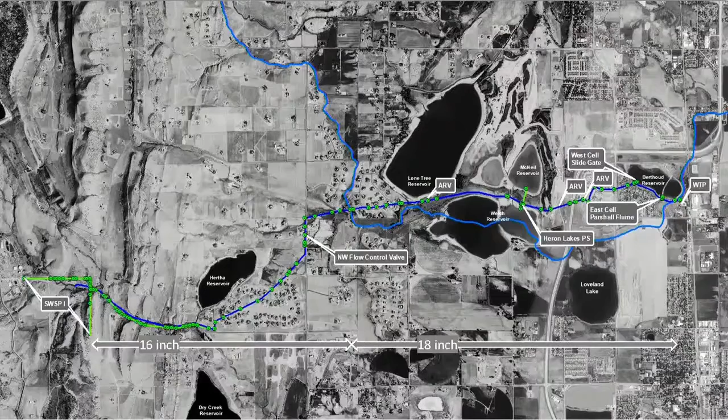Some of the things that we're dealing with are these appurtenances that are along the pipeline. If you look at the map, you see ARVs represented there; those are air relief valves, and this one is the furthest west air relief valve, and that basically is a pipe that's vented to the atmosphere. If we try to push too much water through the pipeline, it starts pouring out of that pipe.

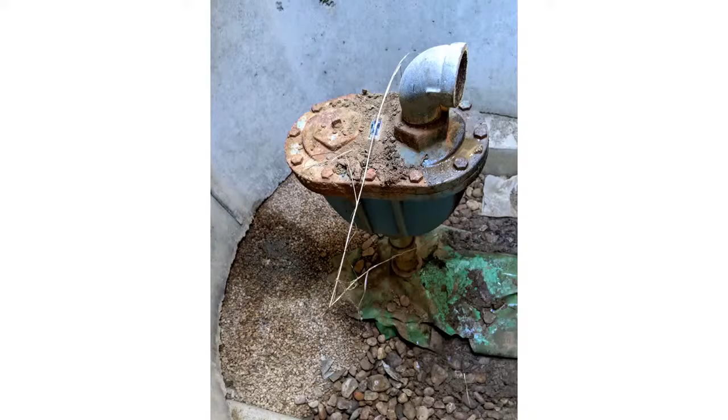The other type of ARV that we have looks like this. It's an old appurtenance, basically the same age as the pipeline itself. What we theorize is going on is these things aren't functioning the way they should. Air is trapped in the pipeline. I don't know if anybody remembers or used to drive a car with a carburetor. It'd get old, your fuel pump's getting tired, it's a hot day, and your car won't start and it vapor locks. Kind of what's happening here. We got air in the line and we can't move as much water as we should through it. So that's one of the problems.

Actually, we're out dealing with that now. Our contract operator is assessing these ARVs and has sent me a recommendation on repairing them. What we're going to do once we get those ARVs fixed or replaced is we're going to do a flow test and measure pressure and flow. We're going to cooperate with Northern Water and just get a good basis to correlate what's actually occurring in the field with what we're analyzing with our engineering tools. And then from that, we can look at modifications to that pipeline in order to try to get some more capacity out of that. So I'm very confident that that existing pipeline will be able to do what we need to do from the standpoint of these ARVs to get the additional capacity out of that.

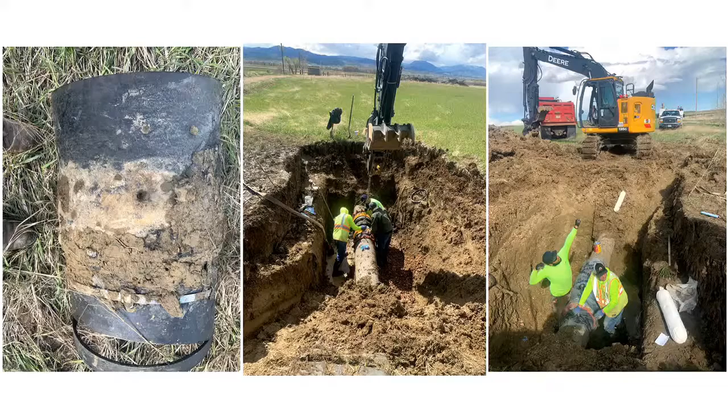The other thing that we need to keep in mind is the condition of the pipeline. In order to get more flow out of it, we're gonna have to boost the pressure up. Here is an example of what occurred earlier this year out on the pipeline. And that picture to the left is a corrosion problem. That's been kind of an annoyance for us over the last several years. Maybe once a year, twice every 3 years, we will have a kind of catastrophic failure.

This one right here was, as I understand, I didn't see it, kind of a colossal leak spurting up into the air and everything, and here it was quite lovely. Anyway, you can see how they repaired it. In the picture on the right, they're quite proud of the repair. So we'll assess the condition of the pipe. Possibly some rehabilitation of that pipe may be necessary in order to handle the additional flow and pressure. We'll know as we're moving forward.

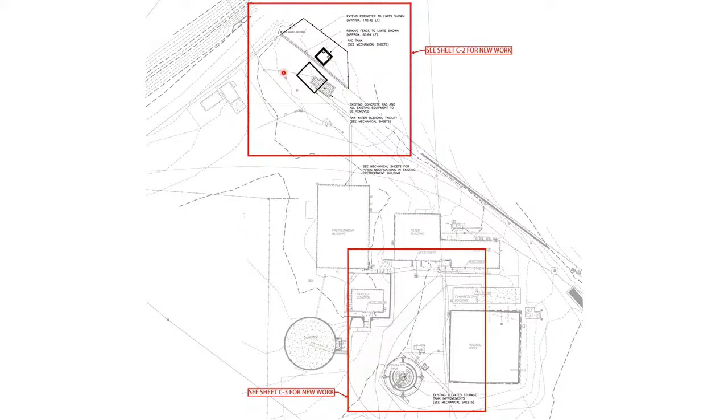So let's walk through those quickly. Here is the footprint. This is the actual site plan of the treatment plant site itself. Zeroing in on the blending facility, what we're looking at here is a building right here, and then this is a buried tank where we will be mixing up a PAC slurry, a powdered activated carbon slurry solution that then will be injected into these influent lines.

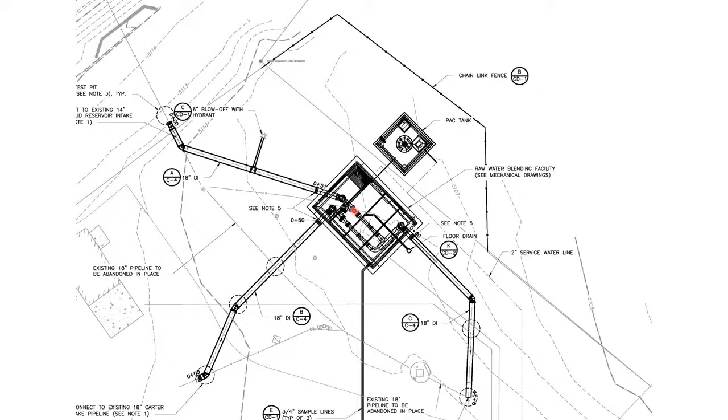So we got this line right here, that's coming in from Carter Lake with no stops. It's just straight from the Carter Lake pipeline. This right here is coming in from the reservoir. And that's what's key. We're not using this facility right now because of the water quality in the reservoir. And so even if we improve the water quality, what we can't do is adjust the flow rates of these two sources and mix them the way we need to in order to get the chemistry right. So that's a big part of this project here.

Let's zero in on those a little bit closer. This is the buried PAC feed system. Basically, it's a buried tank in the ground. It's kind of like a giant ninja mixer, but instead of 1,500 RPMs, this is like 2 rotations per minute. It moves very slow, and then the slurry feed comes out here. Then it goes into this.

So this is the meat of the project. This will be a pipe gallery below ground where the 2 pipe sources come in, and then these various meters and valves are all tied into our SCADA system, and then we have an opportunity to throttle this one down or speed this one up or vice versa. And then this is our final raw water line that then goes to the plant. Right here is our chemical feed equipment. This is pretty high precision equipment that allows us to give the exact right amount of PAC.

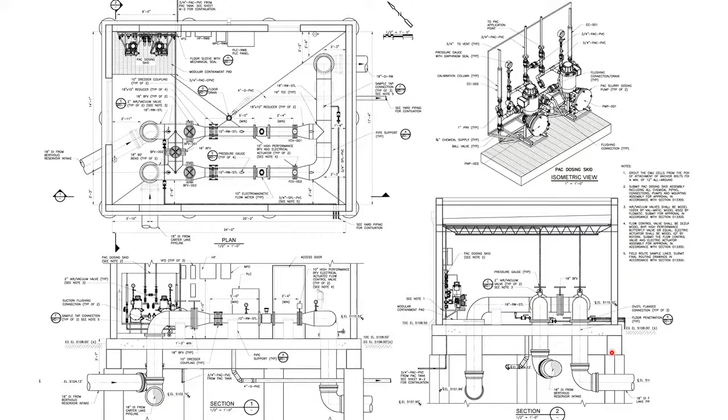And here's the blow up version of that. Here's a section version of the building with the roof and the bar joists and stuff such as that. So that's essentially what that side of the project is. It's nothing flashy. It's just getting some chemical into it and then getting it injected into the line.

The other side of this project is filtration. We're having a terrible time with our gravity filters. The problem is with these conventional water plants, as you can imagine, you clean the water up as best you can, you run it into a filter, eventually several times a week the filters clog and you got to run the water back through the opposite direction.

The problem that we have is that rate that we have to push that water back is almost as much as the capacity of the plant. The final pump stations that pump the water from the plant into the system are 2 million gallon per day pumps. The backwash flow rate is over 4 MGD. So we basically take all the water that we would need to pump into the system and we do nothing but run water back through our filter for not quite an hour.

And so it sets us back on our heels as we're trying to manage our system. We got to make sure our tanks are full because we can't rely on the plant and all that. So it's a big inconvenience, and it definitely impacts the water quality and the capacity of the plant. So what we're going to do to fix that, you recall seeing the old elevated water tank. Well, that tank has been out of service for a while. And what's being proposed is we're going to rehabilitate that tank.

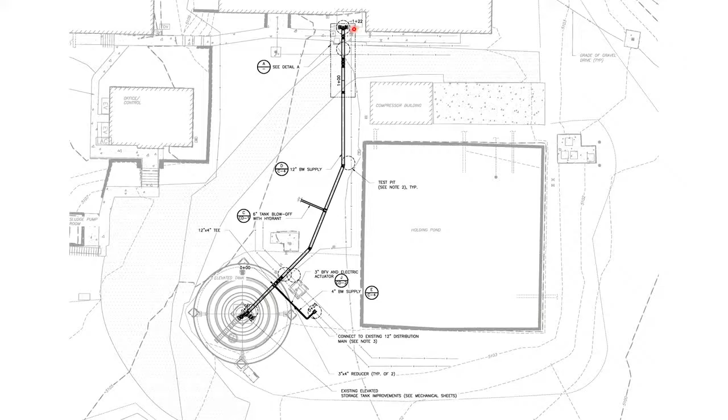Let's see, I think that's pretty much it there. I think I mentioned to you that we're looking to advertise the project right after the first of the year. The proposed bidding schedule that I'd like to propose to you guys tonight is to advertise on the 3rd of January. Publicly advertise that. We'd have a pre-bid conference on the 18th of January and a public bid opening on the 3rd of February. We would analyze the bids, and then facilitate an award to the Board of Trustees on your February 22nd meeting. So that's the proposed schedule.

The construction schedule of these, as you can see, is not huge. All of that work that I showed you there was about 4 months. The tank is a separate contract. That's a pretty straightforward process and a very specialized contractor, so we decided not to try to package that up with all that reinforced concrete. And we also have flexibility as to when to do that. We want that tank painted by the time all this work is done, but we don't want to be out there too early to where the general contractor is bunging up all the paint. We want him finished with that work and out of the way, and then we'll come in and clean up and paint that tank.

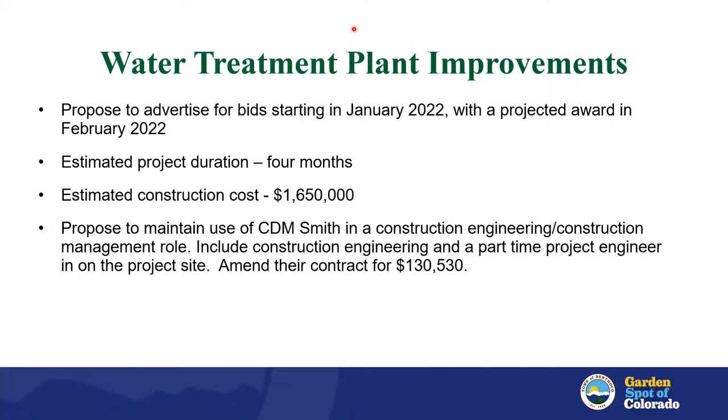Thank you, Mr. Matthews. Any questions? I didn't know if you had an order. Okay, well, there we go.

About how much capacity is this going to increase the water treatment facility by, percentage-wise? This work right now is not an increase in firm capacity of the treatment plant. That said, another out-of-the-box capital improvement we have planned for this year, similar to the tank, that doesn't require a lot of engineering, is a third high-service pump. That'll be another 2 MGD, which is a 50% increase in capacity. And so with that pump and these improvements, we shouldn't have any trouble at all reaching that.

Okay. In terms of future proofing, we're getting ahead of anticipated maintenance and things like that. This is bringing it up to speed and maybe even a couple steps ahead, so we don't have to have this conversation 10 years from now about expanding even more? No, this is not an expansion. This is a catch-up project. This will not serve the 2,600 SFEs that Pete was talking about. We're staring down the barrel at doubling that plant size. The next thing I'm going to come talk to you about is master planning for the wastewater, and in that project we will be dealing with an imminent water treatment plant expansion. Okay, I'm excited to see that.

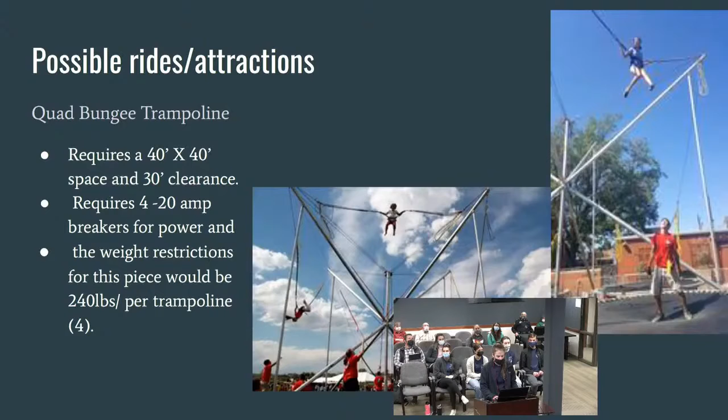So, just looking at the vendor that we specifically researched, here are some of the ideas of things that would be at this carnival. I'm just gonna zip through these, but if you want me to stop and explain more, I can. Hamster balls, a mobile ropes course, a mobile zip line, carnival swing, rock wall, bungee trampoline, and pedal cars. These were just the main ones that they housed, and obviously we're not saying this is the definite list of things we need, but it's just some brainstorming.

Some other ideas we had were having a dunk tank with teachers from the school in it or something fun like that. So we're still playing with it, but this is just an idea. And so that's what we have right now. Thank you guys for listening to us. Do you guys have any questions?

Thank you, Maggie. Questions from the trustees? I have one. All right, Tim? Trustee Hardy? Since they brought up Snowfest, I've always been trying to find more things to do for Snowfest. One is to get you guys to come build a sculpture. But I like the skating rink idea.

But some of the things that we have to take into consideration on that, and I could probably get Christian to find out from our insurance company, but the insurance for an activity like that, you start getting ice and sharp blades and teenagers. You gotta find out how those mix together, so no one gets hurt and liability's covered. The insurance would be my main thing on that, but I'd love to try and get something

like that going. Sometimes these companies cover their own insurance, I believe, for those situations as well, so maybe if I could find someone that would do something like that, then the liability would fall more on them, I guess. But yeah, I'm definitely looking for more things to bring to Snowfest. I've got a couple more weeks to think about it.

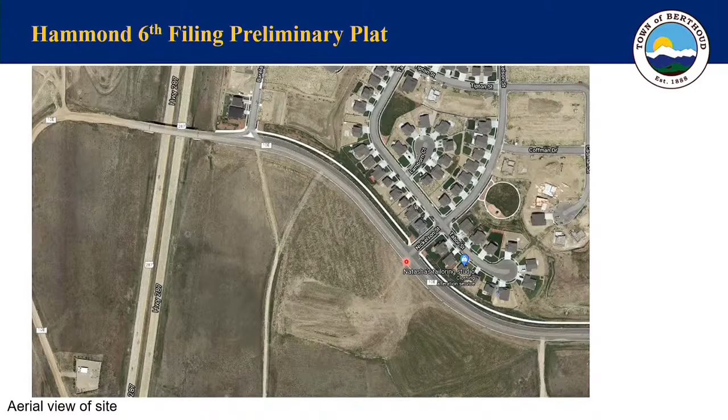So the current zoning on this property is R4, which is mixed use. This property was rezoned along with the rest of the Hammond subdivision in various different stages between 2016 and 2020. R4 allows for a maximum of 24 units per acre with a minimum lot size of 1,200 square feet. It allows the property owners to get a little bit denser than the traditional single family development pattern.

On the future land use map, this property is identified as orange, which is our urban residential zone, and a little bit of the reddish pink color, which is our suburban commercial zone.

So to give you a little background on this whole site: Hammond as a whole, all the way up to the bend in 287 down to the southern extent of this property, was all approved as an ODP and PUD back in 2008 with an overall density of 758 residential dwelling units and about 750,000 square feet of commercial space with a minimum of 5 acres devoted to it. It also allowed for high-density residential uses throughout the entire project. The original developer sold it to the current applicant, who, as he developed the land, has been rezoning it out of the PUD.

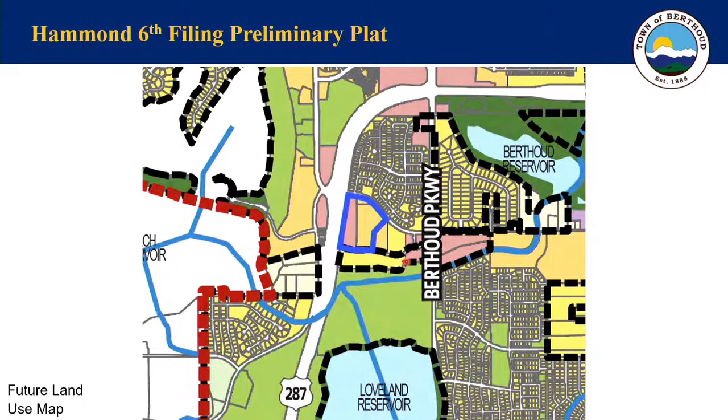I want to note that the entire southern half, south of 10E, of the Hammond property was rezoned to R4, so it's the entire area, as you can see here. The east side of this property south of 10E was a part of the Hammond 5th filing, which came before you all in 2020. Originally, the Hammond 6th filing and the Hammond 5th filing were combined as one. However, staff asked the applicant to pull the 6th filing portion just so we can make sure that there was enough space for potential off-ramps coming off of 287, as well as maintain the 5 acres of commercial that are supposed to be there.

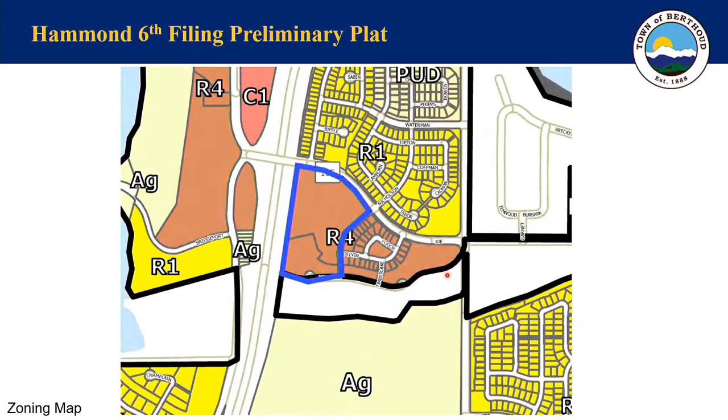And so with that, the Hammond 5th filing was approved by you all, which was the single-family detached homes on Nicholson and Delvin and the other street south of 10E. Because staff asked the applicant to break this up, to allow them to move forward and not hold their project up, we made an agreement with them that the open space, the parks, the subdivision identity, all the amenities that needed to be provided could count for both of them. So, for example, the park in the center of the Hammond 5th filing subdivision also counts towards the Hammond 6th filing subdivision. All the open space on the southern end of this project was also part of open space for the Hammond 5th filing project. They're allowed to count double because we were the reason that they weren't included together.

To expand on the off-ramps, staff met with CDOT throughout 2020 a couple times and were able to gauge where the off-ramps would potentially go whenever they were needed and built. While those specific locations aren't 100% locked in yet, we were able to determine based off engineers and CDOT that any off-ramps would not impact this subdivision if you were to approve it tonight with its current layout. It would also not impact the amount of commercial space required. They would still be able to have their minimum 5 acres of commercial space and not be inhibited by the off-ramps.

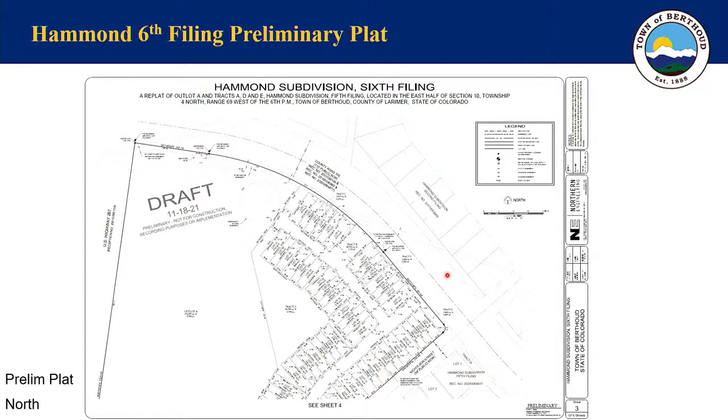This is a 0.65 acre park. And if you combine it with the 0.79 acre park in Hammond fifth filing, that gives you a total of 1.44 acres of parkland, which is more than the 0.95 that we would require between the two proposals. And then the applicant also has provided 0.4 extra acres of open space within this Hammond 6 proposal. Those are mostly found within slivers in between the lots to give them more space and some more elbow room, as well as on the end caps near the edge of the house.

If you combine that with the 12.74 acres of open space along that southern end of the property that Hammond fifth filing dedicated, that almost triples the 4.7 required acres between the two projects. As for the open space elements, the applicant provided a community lawn within the Hammond 6 project, which is that park, which counts for 2 elements, and that'll be enough to satisfy both the Hammond 5th and the Hammond 6 open space requirements.

As for subdivision identity, based off the amount of residential units proposed between the Hammond 5th and 6th filing projects, the applicant needed 7 different subdivision identity elements. They're using a pollinator planting palette, a soft surface trail, a pocket park, a playground, and wood fencing within the Hammond 5th filing project, which were each worth 1 element. As well, the applicant is also proposing alley-loaded streets in the Hammond 6th filing, which counts for 2 elements, bringing their total to 7.

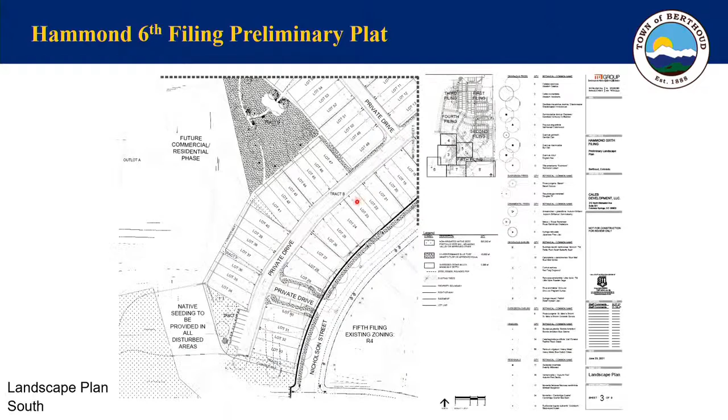Real quick before I turn it back to you, Mayor Pro Tem, I do want to point out that when the staff report was written, we hadn't received an updated submittal from the applicant. However, between then and today, we received an updated submittal that satisfactorily mitigates recommendations number 2 and 3. It's kind of tough to see because it's so far zoomed in, but this is on that corner. This is 10E and this is Nicholson. The issue staff had was that this alley, from southwest to northeast, kind of dead ends into County Road 10E.

We were concerned with the headlights of vehicles and overall noise coming from 10E that could potentially have negative impacts. And so we worked with the applicant to install more trees and taller bushes to mitigate this and make sure that the headlight glare doesn't reach the streets and the noise from the street does not impact the neighborhood. There are only, I think, 4 or 5 lots that would be driving down to this dead end, but we still felt it was necessary and that it would enhance the quality of the community. But the applicant's already mitigated that.

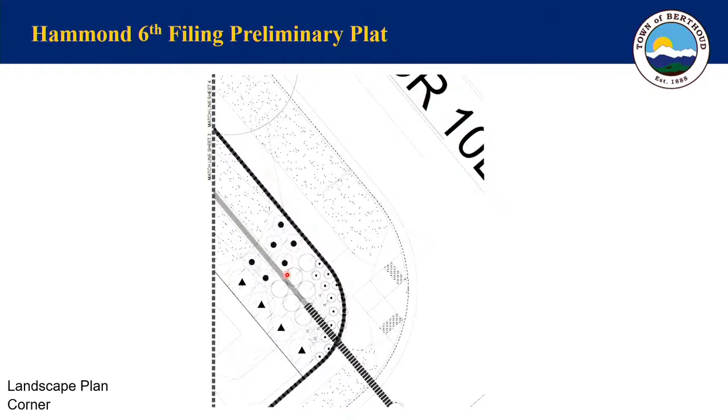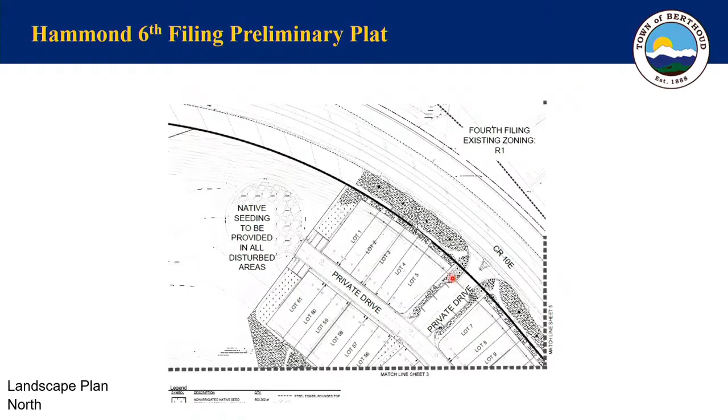And the other one regards the sidewalks. Initially, the sidewalks here accessing off of County Road 10E were attached. And they've since detached them to create the lawn that we all like to see. So with that, I turn it back to Mayor Pro Tem, and I will be here to answer any questions from you or the public, if you have any. Thank you.

All right. Is the applicant here this evening? All right, can you guys hear me? Is the volume okay? Just barely. Okay, I'll be sure to speak up. Is that a little better? Okay, great. I'm going to share my screen so I can show you the presentation. Give me just a moment. All right, are you able to see the screen?

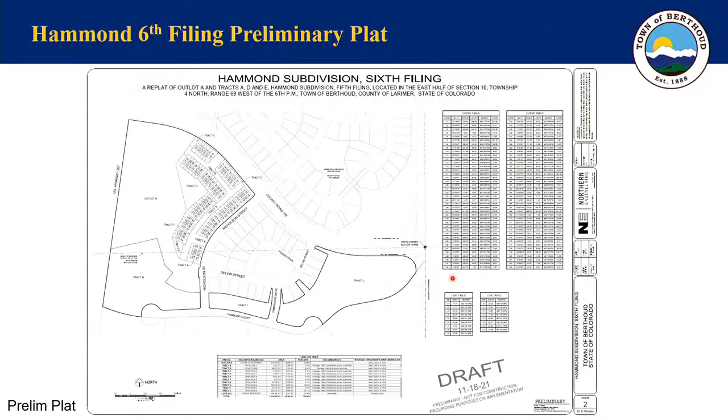Of course. My name is Kristin Turner. I'm with TB Group, and we've done the planning for this project. Our address is 444 Mountain Avenue in Berthoud. So let me know when you're able to see the plan, and then I'll get it. Okay, perfect. Always takes a minute to get set up, so I'm glad it's all working.

Well, thank you for being here tonight to hear about this project. We were really happy to be able to bring this back. As Adam mentioned, this portion of Hammond had originally been envisioned as part of the 5th filing, so this entire area was planned cohesively. And we totally understand the request to remove it from the 5th filing so that everybody had the time to evaluate the possibility for ramps, where those might land, and how that might impact the commercial area as well.

So we held off on the townhomes, and now progress has been made on those ramps, and we understand that there's plenty of room within the right of way, and it won't be impactful to the site. We are just glad to be able to bring these townhomes back and present them to you. So can you guys see the mouse when I move it, or the hand, I guess?

Okay, great. It will just help me to be able to point things out to you. So we have 61 single family attached units here. These are fee simple for sale lots. And as Adam mentioned, these are all located in the R4 portion of the Hammond property. And so I'm just going to give you a quick tour of the site, and then we'll take it from there with any questions that you might have.

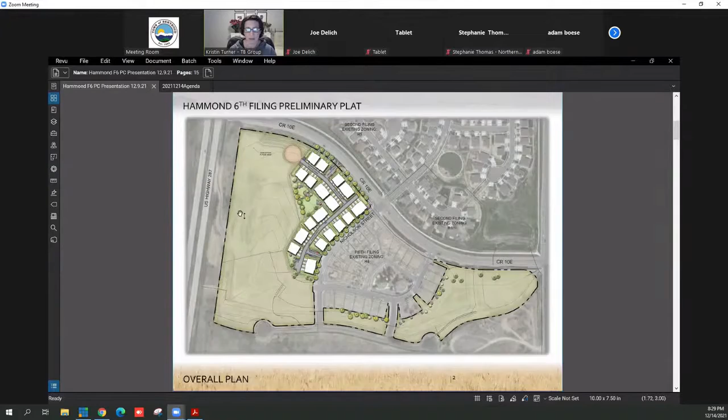And overall, this site is providing more than double the parking that is required for it. So we feel really good about the parking that's being provided for the folks that live here, as well as any visitors that may visit. All right, let me get into the next slide for you. Okay.

All right. So this is an enlargement of our pocket park that I wanted to share with you. So as you can see, it's our pocket park and also our community lawn area. We are showing a playground area here that will have play equipment. And then there's some additional trails that sort of weave around and wrap through the site so that folks have different opportunities to loop around in this area.

We do have several locations for seating through this area, as well as some enhanced planting areas and planting beds. And we are utilizing a plant pollinator palette throughout this entire site. So rather than focusing it in one location, we're incorporating it into all of our planting beds, both within the pocket park, also located at our entrances along the streets, and the planting palette will also be used for foundation planting for the buildings so that we can really maximize the use of it.

So we've got a couple of representational images here for you of playground equipment, our walks, a big open lawn, great place to kind of spill out of your front door, be able to throw a Frisbee, let the kiddos run around, or just hang out and read a book. And those enhanced planting areas as well to add some pops of color and visual interest. So that is what you're seeing here.

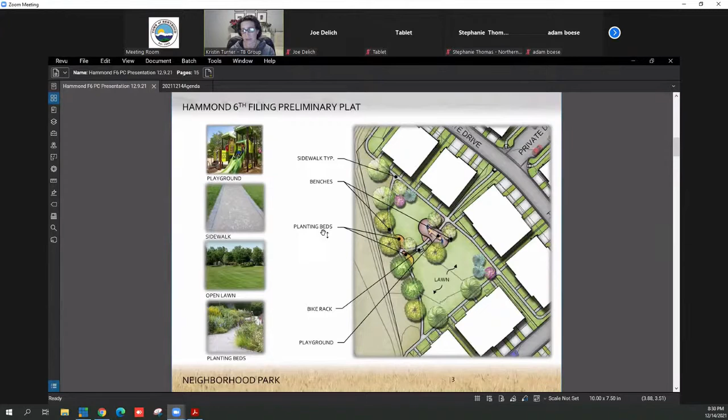And so overall, when we look at this site, I'm going to scroll forward again just so you can see the entire site. All right. So Adam had mentioned these, but just to circle back on them, I missed my page. Here we go. I think they're really key to this southern portion of the Hammond subdivision is that overall the parks that we're providing are just a little bit less than double what is required for this area. The open space is almost triple what is required for this area. So really a lot of amenities in this area that we're providing for the residents that live here, as well as anybody that may be passing through.

I did want to mention that we did have one neighbor show up at Planning Commission and ask some questions about sight distance from these streets. And we had one planning commissioner who asked some follow-up questions about it as well.

So I just wanted to let you know that we have, since Planning Commission last week, gone back and double-checked the sight distance triangles on this site, and we have confirmed that there are no buildings that are landing within those sight distances. I can also confirm that the planting in the planting beds on the corners are all meeting the requirements for the sight distance triangles as well.

The one piece that I have not had an opportunity to check since we were just there last week is some of the trees in the tree lawn. And so we will be double checking if there are any trees that need to be relocated from the tree lawn that may be landing in the sight distance triangle as part of any revisions that we end up submitting back to the town to review. So I just wanted to point out that that was something that had come up, and we have looked into it and confirmed that it is not a concern with the layout for the site.

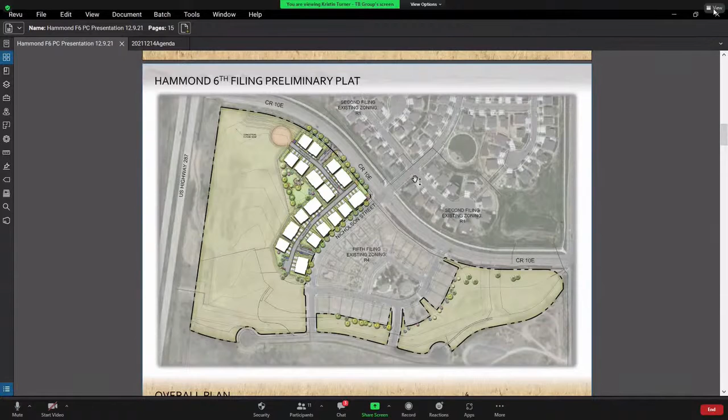I guess, are there any other traffic considerations that need to be done on County Road 10E or Nicholson Street? Stoplights, more stop signs turning County Road 10E into a four-way, dragging that all the way out to Berthoud Parkway, turning that into four-way. 80 units, assuming it's 2 people per unit, plus or minus. That's 160 people, adding 80-some-odd cars, give or take. That's a significant amount of traffic increase that could kind of change how the flow goes out there.

I know that the alley is gonna be controlled by the Metro District in terms of upkeep and all that stuff, but I'm just wondering on the town side, what is gonna be done on our side for mitigating traffic or congestion issues there? Sure, and I think the applicant's traffic engineer is online right now, but I just want to clarify real quick, it's only 61 units, not 80 units. 61 units. Yeah, 61 units.

Within the traffic study, there wasn't a need found to install a stoplight. County Road 10E is listed as a collector within our new comprehensive plan map, which took into account the development, in accordance with the comp plan, of the urban residential at the little higher density within this area. A collector is only 2 lanes, like 10E is now.

The only real different things that were involved were the right in, right out entrance into the northern alleys off of 10E. You won't be able to turn left out of there. You won't be able to turn left in there. And then the additional sidewalks for pedestrian connectivity on the south side of 10E. If the applicant wishes to speak further on that.

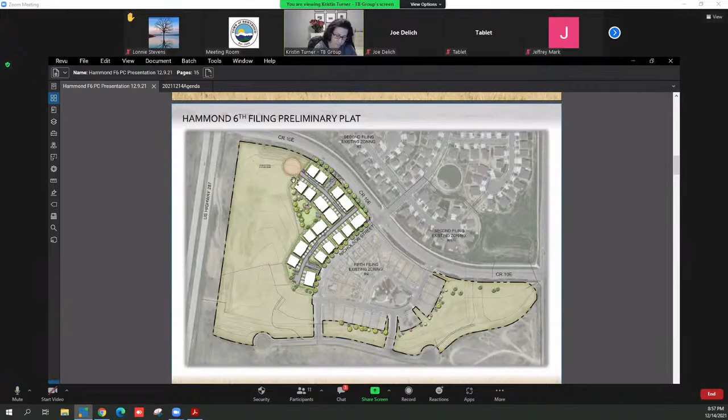Is there anyone? Yes, Lynn, please state your name and address for the record. My name is Lynn Larson. I live at 205 Huddle Street. This is the second time in a week I've seen this presentation. Tonight's presentation initially raised a concern for me on the west side of the development, but I think all the questions the trustees have asked have received the answers that address my concerns. That it's not only going to be an open space, it's going to be commercial, so there will need to be buffers in between, and I think you guys have taken care of those concerns. Thank you. Thank you.

All right. I don't see anyone else in the audience here. Is there anyone on the phone? I saw some questions pop up in the comments. Lonnie's got his hand up. Okay, Lonnie, 3 minutes. Lonnie Stevens, 316 East Iowa Avenue. The only two questions: I heard Mike say something about metro districts. Has this been approved for a metro district? First question. There is an existing metro district for this subdivision. Okay, it just seems to be small for a metro district, but that answers that question.

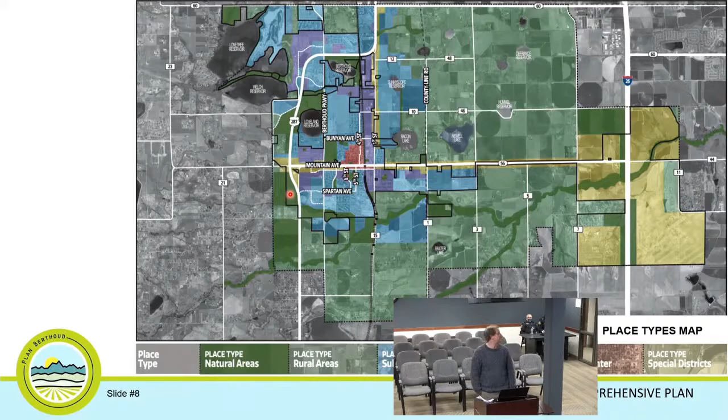How's it feel with Lonnie not here grilling you on some stuff? I was thinking, how could I take his little packet of comments before like 11 or 12 or 1 o'clock in the morning? Maybe I was thinking at the breaks, maybe it could just be knocked off of his dais, but anyway, I'm sorry. There's no one else here. It's all fine. All right, anyone else, any questions, comments, concerns?

No, I just think we just keep continuing what we've been doing, keep fixing those little holes, making those holes smaller, making our development code better. And I mean, just in the last 4 years, it's amazing how we've taken it from here to here and really got it dialed in, and just learning from the experience and getting things done. It's really been nice to fast pace it forward with some great thought. I mean, we make decisions pretty quickly here, and I think they've been pretty good decisions, and we're starting to see it finally. And so no questions? No questions, just comment, I'm sorry. I pulled a lot.

All right, so I will go ahead and we will open the public hearing. Is there anyone in the audience today who would like to speak? Okay, seeing none here. If there's anyone online, virtual participants, you can raise your hand in your Zoom meeting controls or send a chat message. If you'd like to speak, telephone callers can press *9 to indicate that you'd like to speak. Mayor Pro Tem Dower, there are not any participants requesting to speak. All right, with that, we'll close the public hearing. All right, now open it up for discussion, comments. Just repeat my comment. All right.